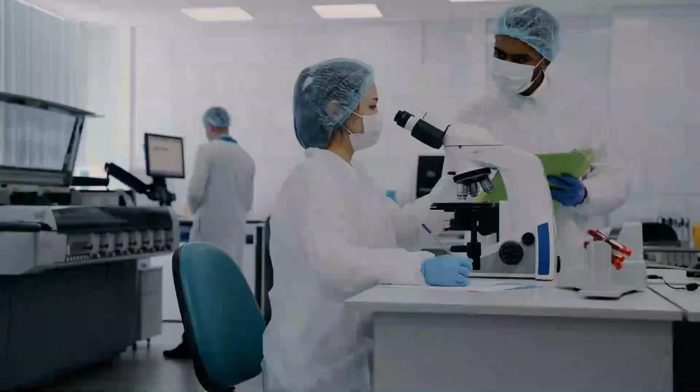One example is the NEOM project. It includes an airport, a shipping port, industrial areas, research facilities, sports and entertainment venues, and tourist attractions. Want to know more? Stick till the end of the video to find out more.

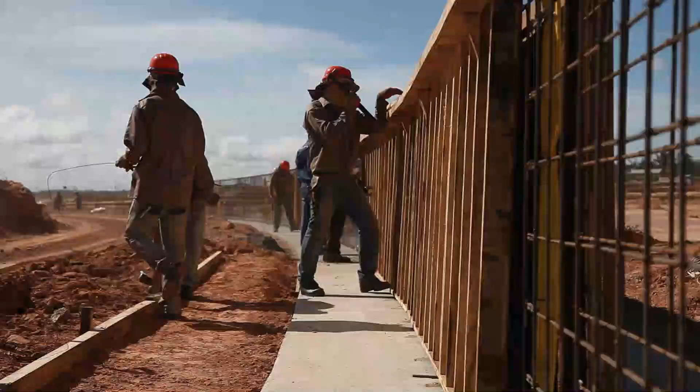What is the Line project? The Line is a proposed smart linear city in NEOM Tabuk, Saudi Arabia, with no cars, streets, or carbon emissions. The city is part of the Saudi Vision 2030 project, which the Saudi government claims will create 380,000 jobs and add $48 billion to the country's GDP. The Line is intended to be the first phase of NEOM, a $500 billion project.

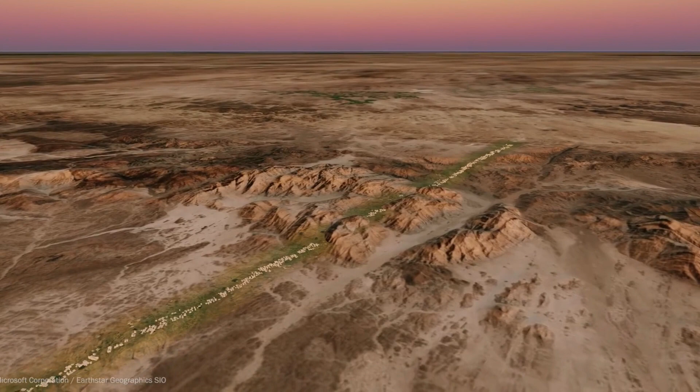The city's plans call for a population of 9 million people. Excavation work had begun along the entire length of the project as of October 2022. The project has been criticized for its impact on the environment and the local population and its technological and economic viability.

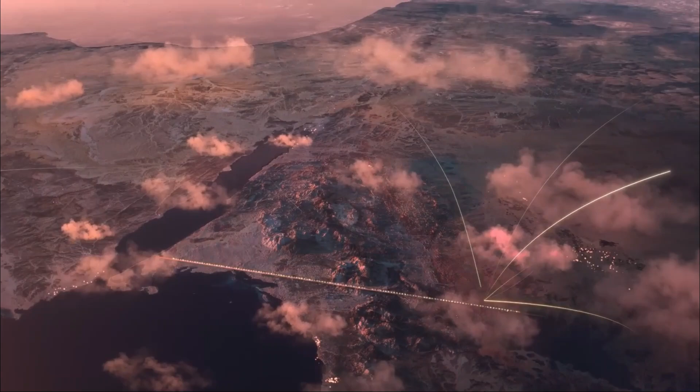When completed, the Line will span 170 kilometers and protect 95% of NEOM's natural environment. On the Hejaz Railway, it stretches from the Red Sea to the city of Tabuk.

It's expected to have a population of 9 million, resulting in a population density of 260,000 per square kilometer. In comparison, Manila was the world's most densely populated city in 2019, with a population density of 44,000 people per square kilometer.

The Line's design consists of two mirrored buildings separated by outdoor space, with a total width of 200 meters and a total height of 500 meters. This would make it the country's third tallest structure after the Abraj Al Bayt clock tower and the proposed Jeddah Tower, and the world's 12th tallest structure.

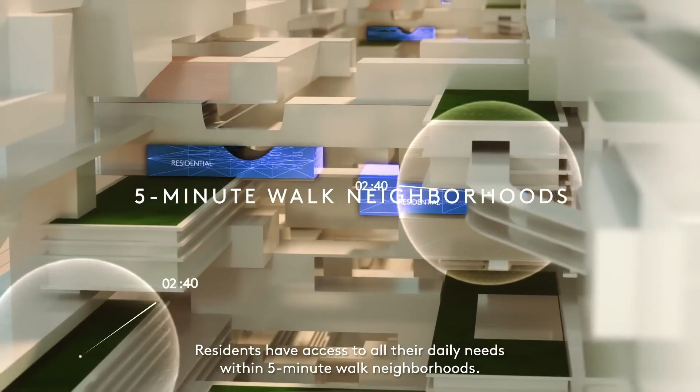Nodes will be established throughout the city. All daily services are intended to be within a 5-minute walk. The city will also be entirely powered by renewable energy.

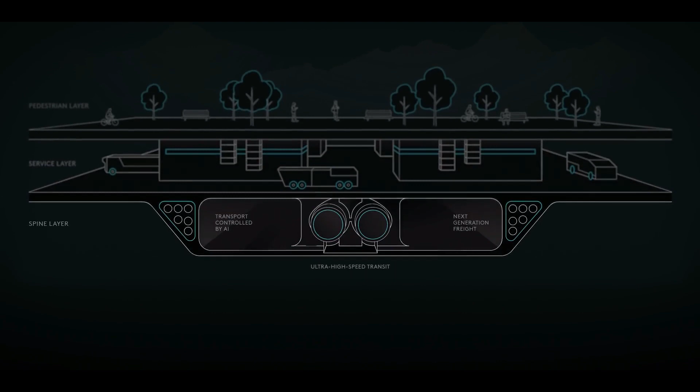The Line will have 3 layers: one for pedestrians on the surface, one for infrastructure underground, and another for transportation underground. The transportation layer will include a high-speed rail system that will allegedly allow people to travel from one side of the town to the other in 20 minutes.

This would necessitate an average speed of 512 kilometers per hour, which is faster than any existing high-speed rail at the time of the announcement.

Its history: Saudi Crown Prince Mohammed bin Salman announced the plan for the Line in a presentation on state television on January 10, 2021. The first residents were expected to move in during 2024, after initial earthwork began in October 2021. The project's first phase is scheduled to be completed in 2030 as of July 2022.

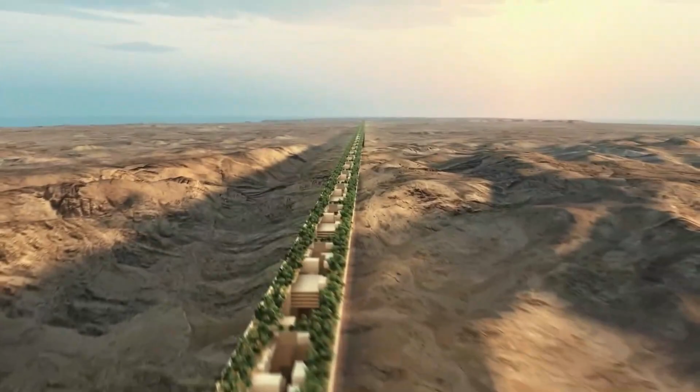Crown Prince Mohammed bin Salman, who also serves as chairman of the NEOM Board of Directors, issued a statement and promotional video on July 25, 2022, resulting in increased media coverage of the project. This also raised concerns about the design's merits and environmental issues, with critics concerned that the project would create a dystopian and artificial facility that would displace the Huwaitat indigenous tribe and disrupt bird and wildlife migration.

Construction on the Line began in October 2022, according to drone footage released by OT Sky, with extensive excavation works taking place along the entire length of the project.

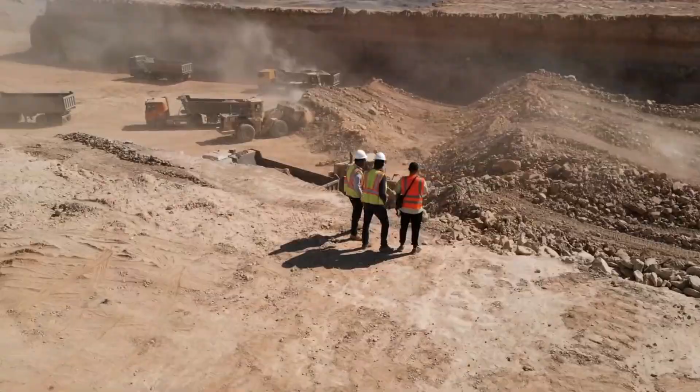What has been happening in recent times? According to an interview with Dezeen, Princeton University Associate Professor Marshall Brown believes that such large-scale urban planning as the Line, as well as the conditions required to achieve the slick futuristic aesthetic in the concept art, are highly impractical due to a large number of factors at play.

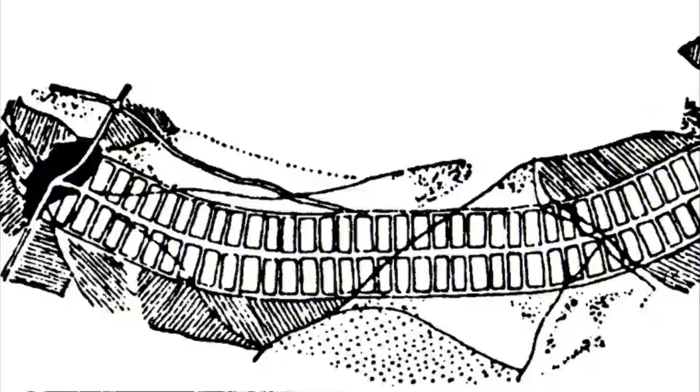C40 Cities' Helene Chartier compared it to other unrealized linear city projects, such as Soria's 1882 design and a 1965 proposal for a linear settlement in New Jersey.

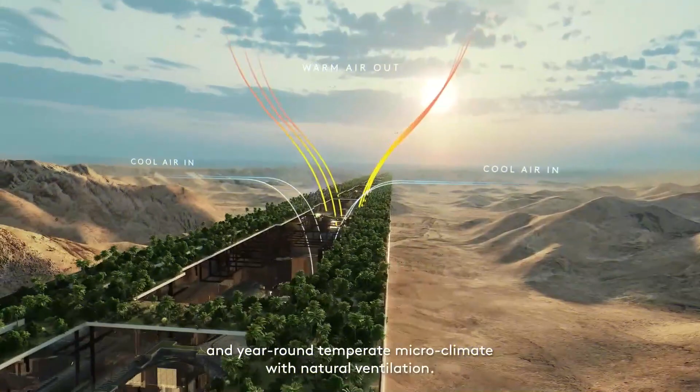Dutch architect Winy Maas stated that he would love to live in such an environment, but he described the concept art's profile as monotonous and conducive to unfavorable wind flow through the intermediate space. Nevertheless, he praised the overall concept for dealing with densification and heat regulation within cities.

Regarding the quality of life, Philip Oldfield of the University of New South Wales believes that the actual quality of life is more likely determined by how well managed the city is rather than its visual appeal.

However, Oldfield criticized the project's carbon footprint of approximately 1.8 gigatons of CO2 equivalent in glass, steel, and concrete, claiming that you cannot build a 500-meter tall building out of low-carbon materials.

Digital rights researchers such as Vincent Mosco have characterized the city's data collection scheme as tantamount to a surveillance city. In response, Joseph Bradley stated that the NEOM coordinators are working to resolve privacy concerns and that Saudi Arabia has a personal data protection law.

Aside from the merits of the proposed city, the Saudi government's actions in pursuing the project have been scrutinized. Shadli Ibrahim and Ataullah al-Huwaiti of the Huwaitat tribe were sentenced to death in October 2022 for refusing to leave their village as part of the NEOM megaproject. Shadli al-Huwaiti is the brother of Abdul Rahim al-Huwaiti, who was killed by security forces in April 2020 in his home in Al-Khuraybah in the Tabuk province after posting videos on social media opposing the displacement of local residents to make way for the project.

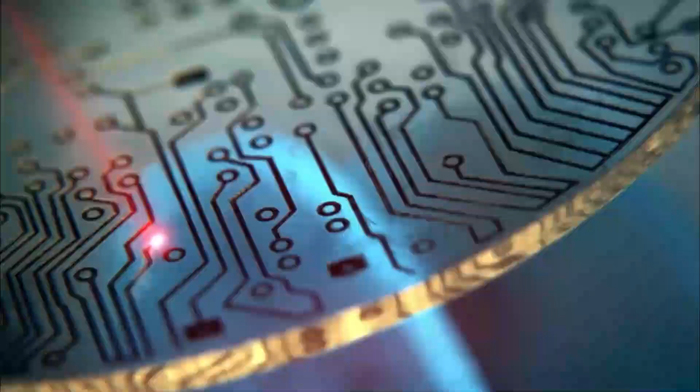Environmental and community impact. The line aspires to be zero emissions. Energy is derived from renewable resources. Green hydrogen generates export revenue. Wastewater is recycled, and cutting-edge smart city technologies and mixed-use buildings are incorporated. Car ownership is being phased out in favor of walking, cycling, and public transportation.

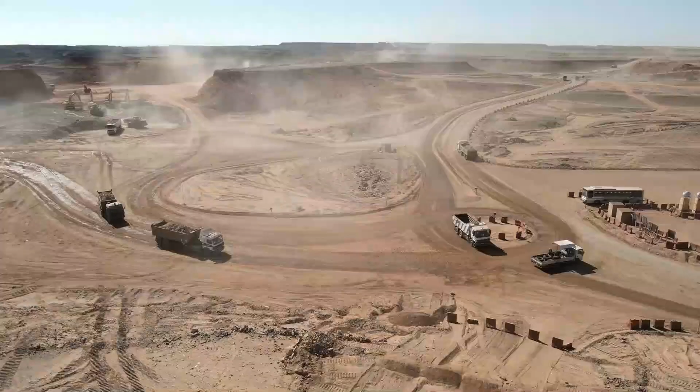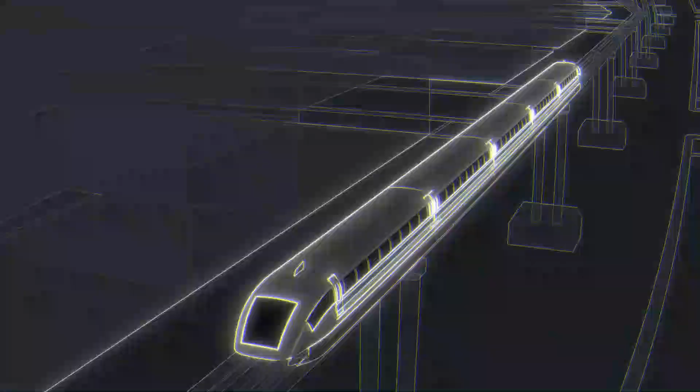However, the materials and construction of such a massive project could produce a lot of pollution. According to the concept, no one would be more than 2 minutes away from nature - in other words, the urban edge at ground level. But does this account for the time it takes to get a lift? A high reliance on vertical transportation may stymie hopes for truly walkable or bicycle-friendly precincts if not carefully designed.

The line could be built in modules, but it is unclear whether these would correspond to neighborhoods. And will individuals, businesses, and other entities have creative control over how their designs are expressed, or will the entire city look similar? Independent expression of built form is inherent in traditional cities, but it may be impossible with such a rigid structure as the line. This begs the question of whether people will warm to it.

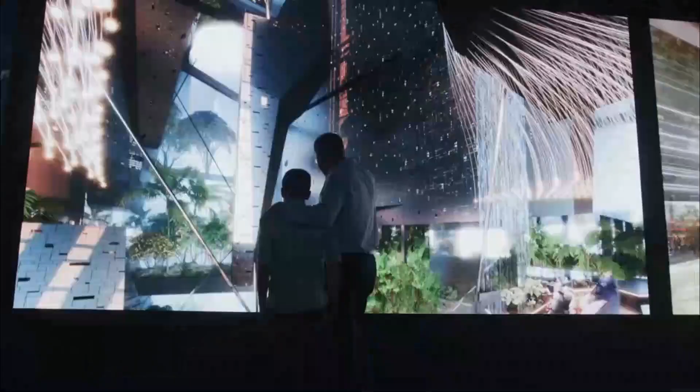Creating and maintaining a vision. The line was supposed to be finished by 2025 to revolutionize urban living. It remains to be seen whether such a complex megacity can be completed so quickly, as construction has yet to begin in earnest. The line promises that it will be based on human experience, that there will be progressive laws, and that healthcare will promote individual empowerment. However, as new migrants bring their values, it may be difficult to maintain this vision.

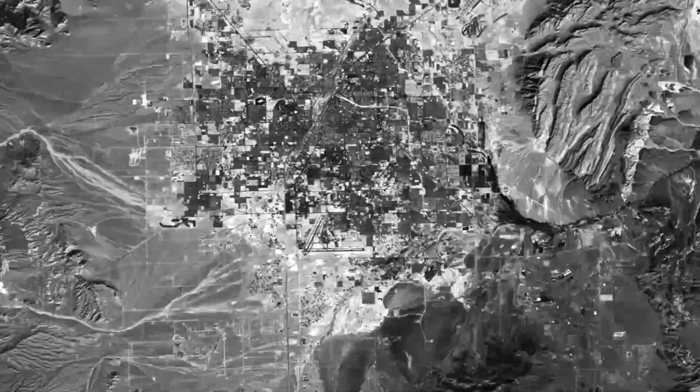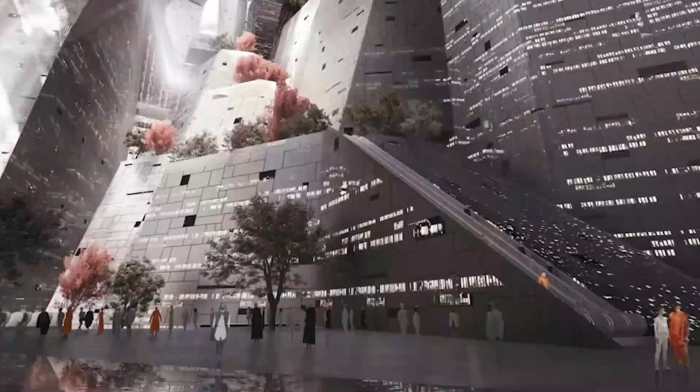A nation-building project. The line appears to be a massive nation-building exercise. Its planned population of 9 million represents a 25% increase over Saudi Arabia's current population of 35 million. The line's marketing strategy focuses on environmental sustainability, technology, luxury, and professional lifestyles, innovation, and a strategic location. This implies that its planners and designers intend to create a unique and exemplary urban development that will quickly transition Saudi Arabia to a post-carbon future.

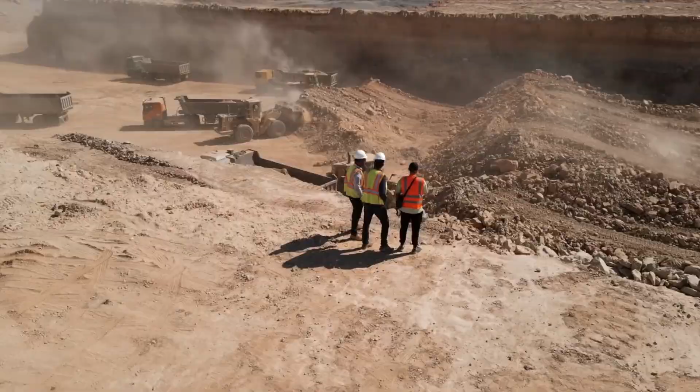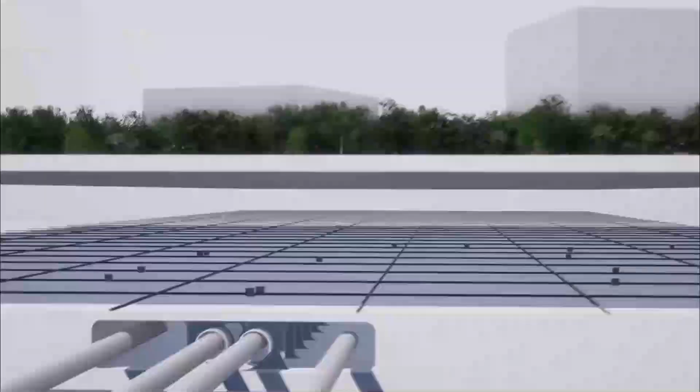All of the elements are in place to accomplish this. However, from a planning and construction standpoint, it will necessitate enormous willpower, financial heft, and capability. The project costs appear to be reasonable at $55,000 per resident. Assume that this is only possible in a country with much lower employment costs than developed economies and that it only relates to infrastructure. Even so, it remains to be seen how ultra-high-speed transit and cutting-edge infrastructure and services can be cost-effectively integrated into the world's largest building.

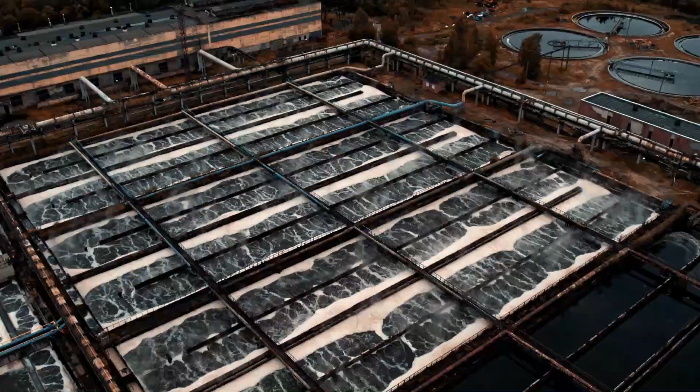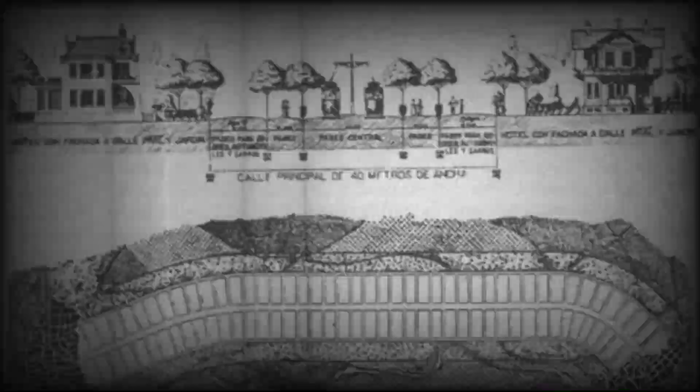The linear design that underpins the line is not a novel concept. In 1882, the Spanish urban planner Arturo Soria y Mata proposed the concept of a linear city. By incorporating infrastructure such as water, electricity, gas, and transportation along a narrow, linear urban corridor, this concept enabled significant efficiencies in infrastructure. The design's central tenet was to ruralize the city and urbanize the countryside. This idea is echoed in the line. However, one has to wonder about the effects on the countryside.

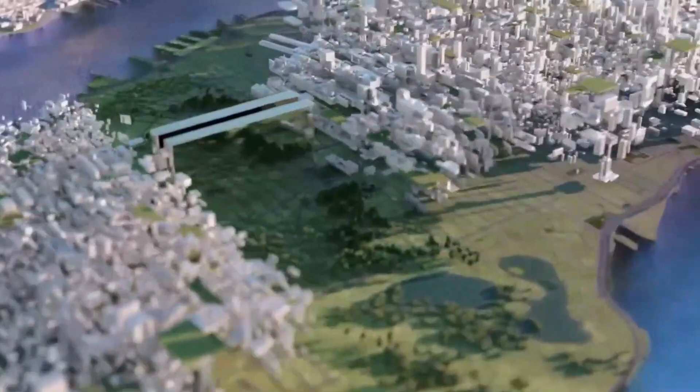How would a continuous 500-meter-high mirrored barrier reflecting desert heat and light spanning 170 kilometers affect local biodiversity? The line appears to follow an east-west axis. This may be optimal for solar thermal management, but it will most likely cast long shadows in the middle of winter, and it remains to be seen whether the line will be able to attract the residents it requires to succeed.